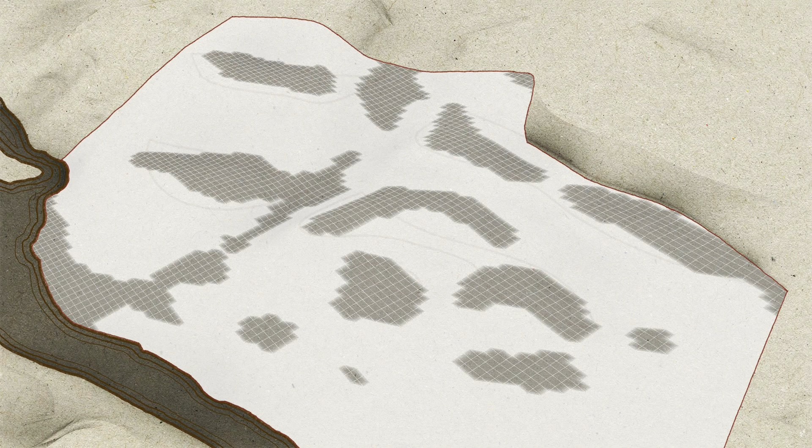The site is located on the south-facing side of the gorge. The size of the site is based on a rough study of the resources required to sustain a population of 150. One of the biggest challenges of the site was the steep terrain. I conducted a study of the terrain and located the most level areas. These more level areas were used to organize the layout of the settlement.

The eastern side of the site is the central area of the settlement. This is where the community members live and carry out their daily lives. There are 10 residential buildings, each for around 15 people. A meeting building is located at the center, where common meals, meetings, and celebrations are held. Additionally, there is a school for the children and a workshop building to operate a small craft business.

To the west of the main settlement is the farm. This includes a vegetable garden, an orchard, and a barn for livestock. The main crops of the garden are potatoes and sweet corn, as well as numerous other vegetables. Along with the orchard, the area needed for the garden is based on the community's demand for vegetables and fruit. There is also a sawmill for harvesting timber from the site. Much of this timber is western white pine, a wood suitable for constructing housing on the site.

Above the main farm area, there are additional fields that are used to grow hay for the livestock and potatoes to sell as a crop. Two dams collect runoff from the terrain, which is used for irrigation. In addition to planning the settlement, I focus more closely on the barn and the residential buildings.

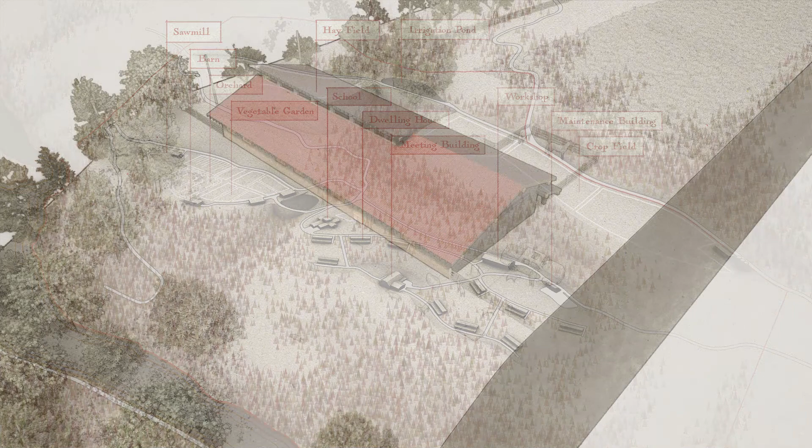The barn is located to the south of the garden and houses livestock that produce meat, dairy, and eggs. The layout of the barn is centered around areas that require water and electrical power, such as a room for egg washing, a mechanical room, and a sink and storage room. The chickens provide eggs and are able to roam the orchard, fertilizing the ground with their feces and protecting the trees from harmful insects and caterpillars.

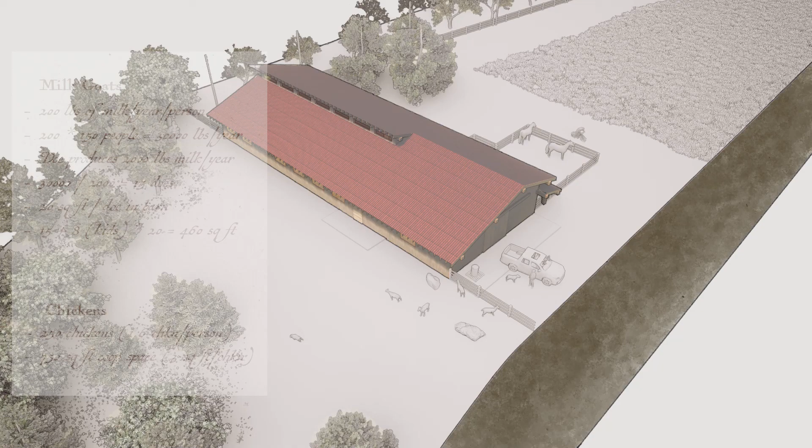Milk goats provide dairy produce for the community. These hardy beasts can forage on the steep terrain south of the barn. Pigs can eat food scraps and provide a supplemental meat source. And horses. Well, I guess you just can't ride the Idaho range on a milk goat. Like the crops, the space needed for the livestock is calculated from the food demand of the community. The barn provides natural light inside and space outside so that the livestock can thrive and produce well.

The residential houses array along the topography of the slope. Each house accommodates around 15 people, which includes several families and singles. Since self-sufficiency requires that these houses are energy efficient, a major part of the design process was energy modeling. Energy modeling takes the climate conditions of a house, as well as its massing and construction, and predicts its energy use. One of the best ways to view energy use is in a monthly energy balance chart. The goal of energy modeling is to reduce the energy loads of the building by iterating design options.

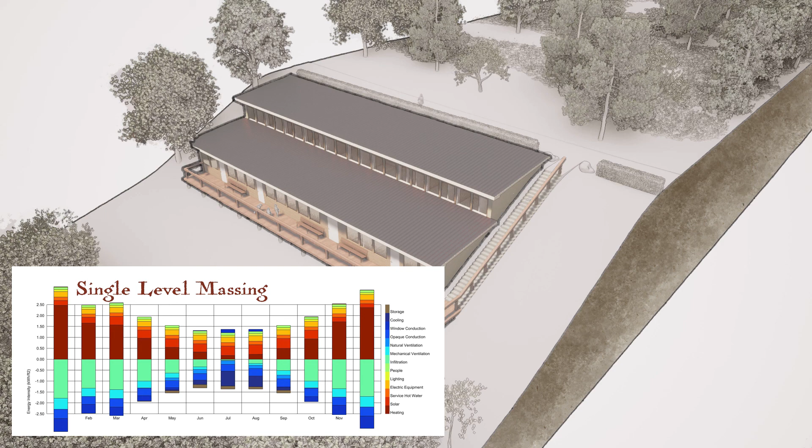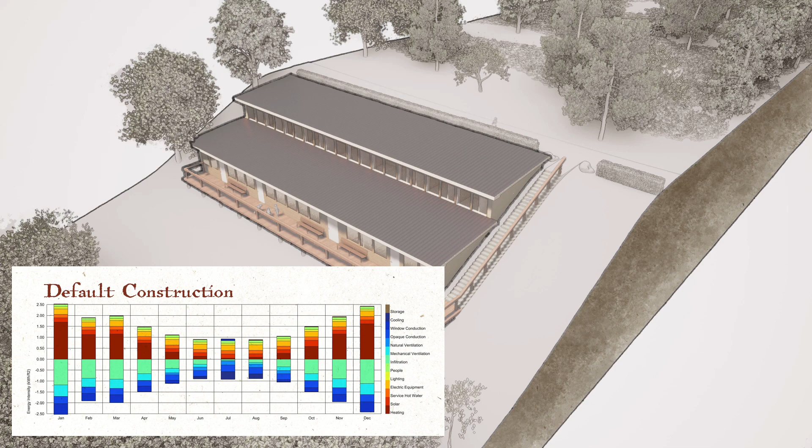For example, I tested a tiered and partially underground massing against a single level above ground massing of the same floor area. The tiered massing performed significantly better because of increased south-facing glazing and increased contact with the ground. I also tested the performance of construction options by using the baseline code construction as a benchmark. By adding ICF walls and increased insulation in the roof and windows, I achieved an improved building performance.

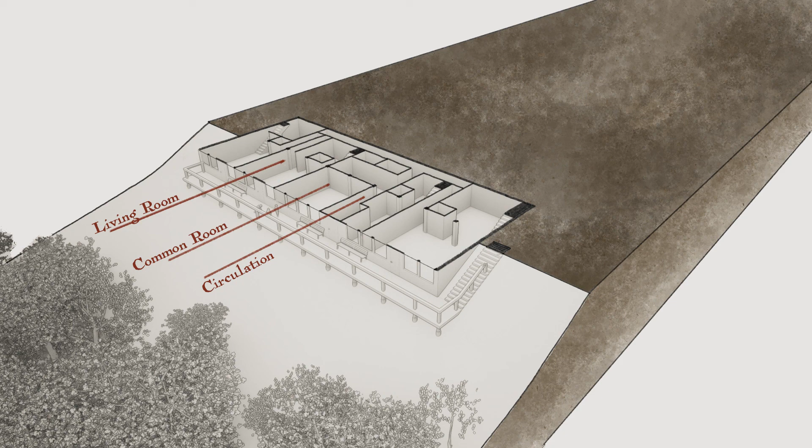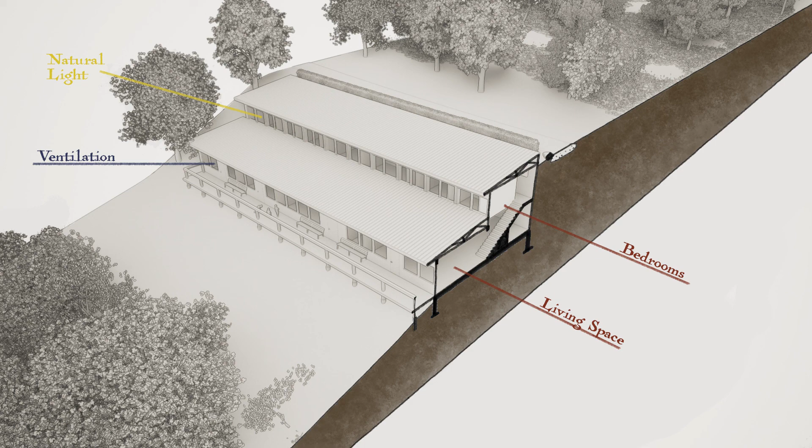Community occurs at multiple scales, and this is evident in the layout of the buildings. There is a central common room and kitchen for families to mingle, but each family is also able to have necessary privacy in their own apartment. In general, living rooms are on the lower level and bedrooms upstairs. The many windows provide light, air, and views to both living room and bedroom spaces. Space around each house provides extended living and recreation spaces for families outdoors.

Well, that's my project. I chose an undeveloped site and tried to imagine a home for 150 people. The nature of this project leaves almost infinite scope for further research and design. Overall, my goal with this project was to take on complex problems and learn a lot about many things. I have certainly learned a lot and will continue my interest in the questions I encountered through the process.